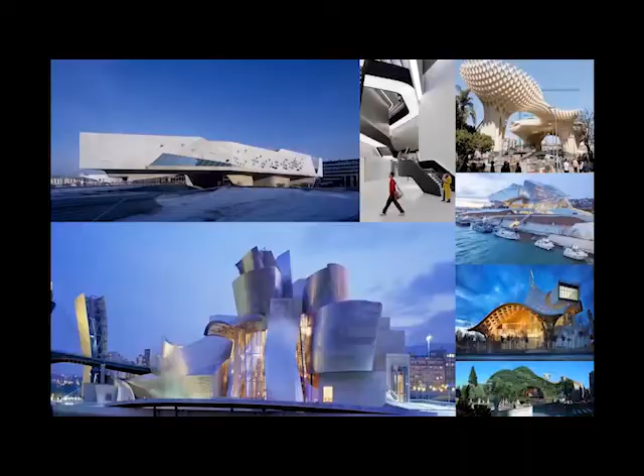I think when we think about this, we are a group of people, and most of the members of Urban Future organization, either within the group itself or people that we collaborate and partner with in terms of engineering and other disciplines, have been working on many different practices, many different constellations, and many of us were participants and active in architectural pieces, in practices that have been quite prominent.

I think what you realized when you worked on these projects was that you were giving up a lot of your energy and your creativity for the greater good of something larger than yourself, in this case another practice. But what we tried to do with Urban Future Organization was say, if this means we are people working together on these projects, maybe we can do this under our own management. And that's kind of what we've done.

So we got together, and our CV is pretty remarkable, because the different members of the organization of UFO have such a broad experience from practice, from research, and from academia.

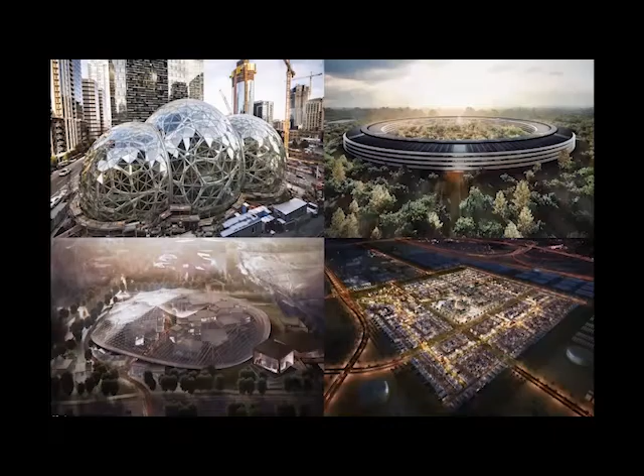I think when it comes down to it, what we try to do as a practice is maybe to challenge some of the conventional wisdoms that we all know so intimately well. And maybe in a changing environment, in a changing world, we have to think about this in a different way.

So today, maybe we have to look at resources, material, planning. Is permanence good? Is it something bad? Do we want to make things return to nature? Do we want to find cheaper, easier ways to construct buildings? Do we want to question traditional materials? Do we want to think about how we live together in different ways? These type of questions influence the way that we practice, the way we teach, and the way we research within Urban Future Organization.

And here, pardon me, this is an illustration. I'm not sure the credit has fallen off the image here, but it's basically a student project. What it illustrates is this idea that we got from the type of partners that we have.

So we work a lot with a practice, as some of you might know, called Arup, Ove Arup in London. We work with other practices like AKT, Buro Happold, and so on, renowned structural engineers, and in a way they have an attitude towards technology which is that everything is possible. Just maybe not everything makes sense, but everything is possible to do.

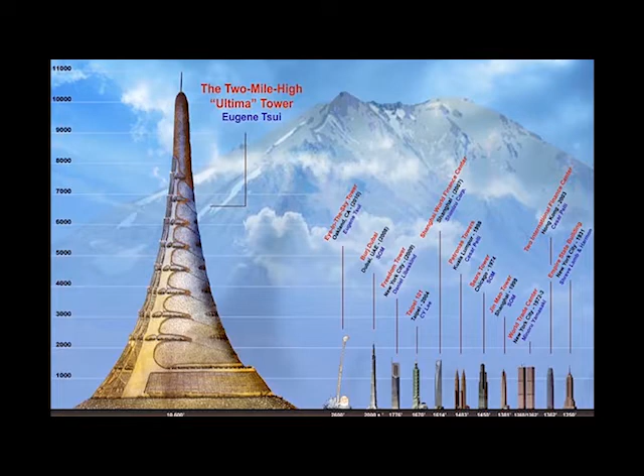So this idea of technology is coupled with this need that we believe in. I think some people are still wondering what this has to do directly with architecture. But for us, we are trying to look for other models where we question the way we do construction, the way we use materials and resources, so we can create an architecture that gives back more to the environment than what it costs.

And this is one of the founding principles that we try to apply in the way we think about our projects. We test this in academia, we develop it in research, and then we try to implement some of these ideas in practice.

And thirdly, we have this idea, and I think we're all aware of this, that architects don't necessarily build buildings ourselves, but we represent buildings, and we produce instructions for other people to carry out our will. And if we only know so much about technology and how we build, maybe that's going to limit what we represent and what we learn how to draw. But it's also the other way around. So this relationship between representation and what we build is quite important.

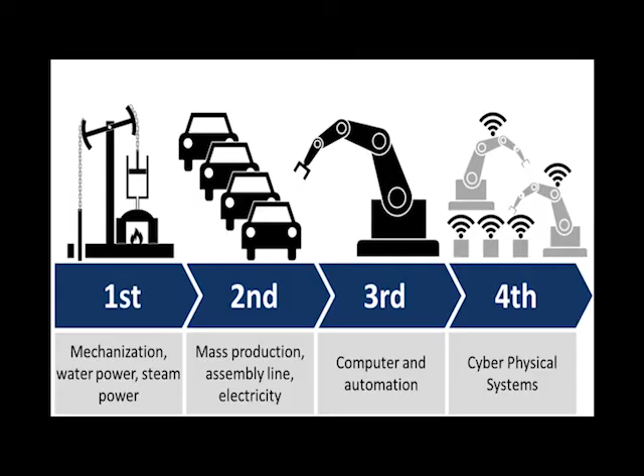So basically, this is about the second, third, and the fourth industrial revolution, and then this idea that architects, we are primarily working on representation, but it's very important to push the border of representation and the way how we construct things.

To go back to, in a way, where I started, this is the idea of trying to work productively or predictively. So it's really an idea of not trying to just reject whatever happens right now, but to try to find models or parts of models that allow us to look at things in a way that makes the existing models, to a certain degree, obsolete.

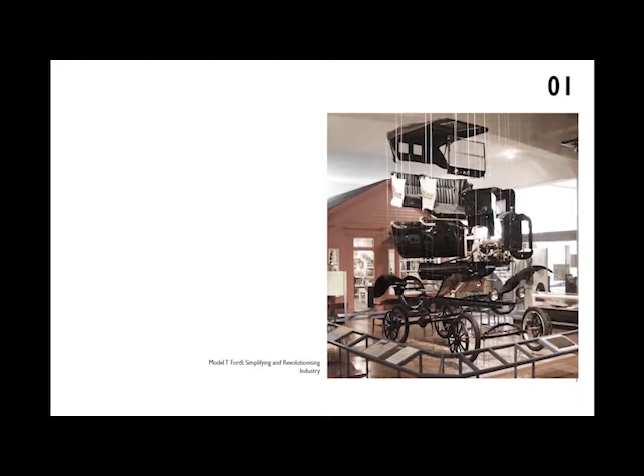So I think what we're trying to do is look for models that let us question that: how can we reduce the number of layers we have? How can we use materials differently to simplify the way we build, or find another way of reducing the complexity of construction we find?

The fact that we are at peak oil, we all know. We think this environmental predicament we face is also an opportunity to rethink the way we do things, putting our empathy, our ingenuity, and technology at the center of our survival.

This is something Rifkin talks about in the Third Industrial Revolution, and I think it's quite central—that there are things we can do to make things better.

But ultimately, I think the real problem we have in the world is how we're going to feed everyone, how we're going to feed our new population. So we have to think about how to contain farm sprawl—the fact that we're turning the world into agriculture—and find other models for how we use land.

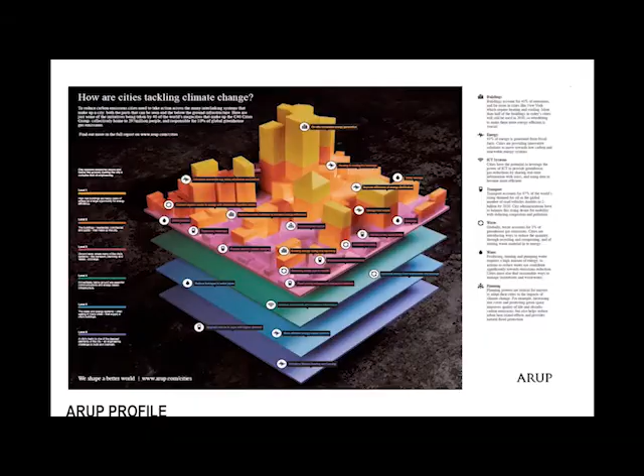So that's really what we're trying to push. This is an idea of what we try to represent in architecture. If we try as students or architects or practitioners or researchers, if we can push ourselves not to be limited to the way we represent things, we can actually work with ideas in a different way.

This is a very simple thing, an exercise we got from my first year tutor in architecture, who claimed that if you can draw a stone, you can draw anything. So you don't limit yourself to the things you can represent in the beginning. It's important both in academia and in practice to evolve the way we represent geometry, form, and buildings, in order not to be limited to the modes of representation.

Today you can talk about that in relationship to digital tools. Maybe it's not drawings, but modeling. Now we can learn SketchUp or some other program, learn how to extrude lots of geometry together. But there is an equivalent to the digital kind of life drawing, where you can also learn how to model and use your digital tools to represent things that are not immediately simple and graspable.

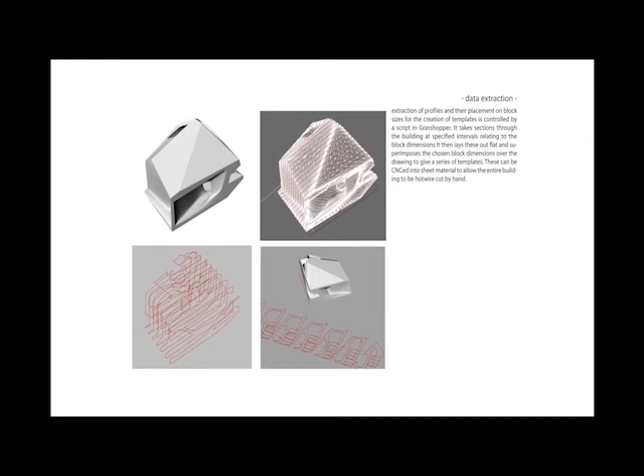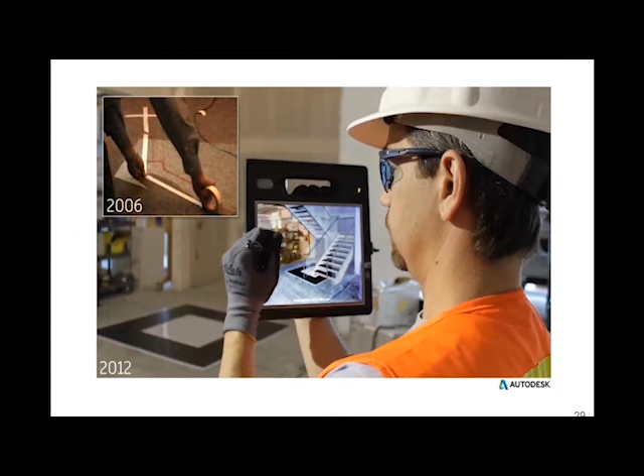So this is something that we try to do. We try to develop the way we can draw and model, so we can be part of affecting everything from an initial design sketch to the way we realize that on site, and how we can use maybe augmented technology to bring this digitally from the digital models into the production of a building, into the actual realization and finished thing.

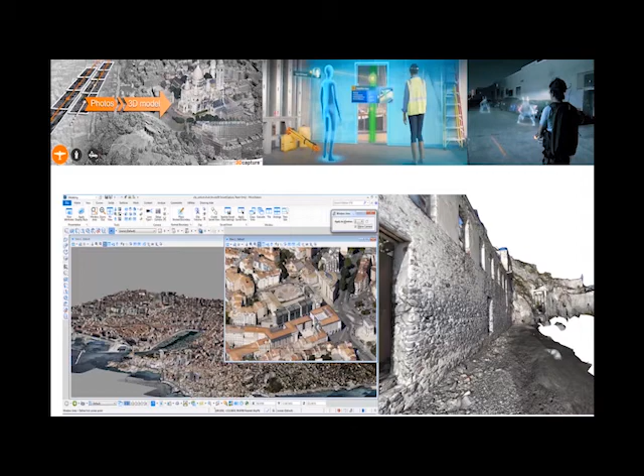In order to do this, we use a range of techniques today. We experiment a lot with 3D scanning. We look at different AR technologies, different ways that we can interact with instructions, so we don't have to do 2D drawings necessarily. We were part of organizing the architecture and geometry conference at Chalmers a couple of years ago, when we were working with this.

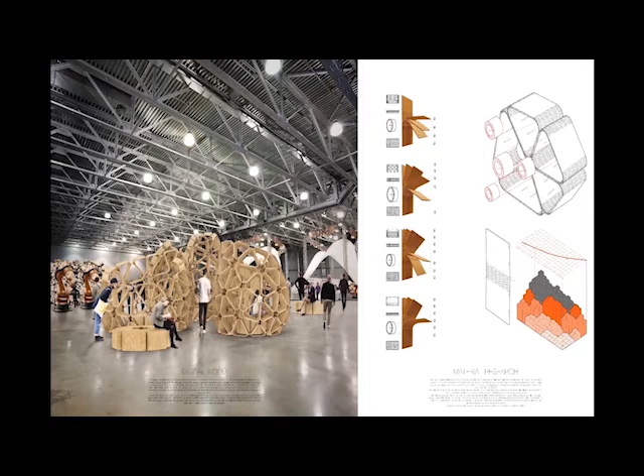Some of these ideas we then try to turn around into student projects in teaching. So some master students of ours developed a pavilion for a very large trade fair in timber construction in Gothenburg, where they got paid to build this prototype using plywood. It's quite simple - they had a producer of plywood and a simple 3-axis milling machine, and we tried to develop a range of different ways to use this.

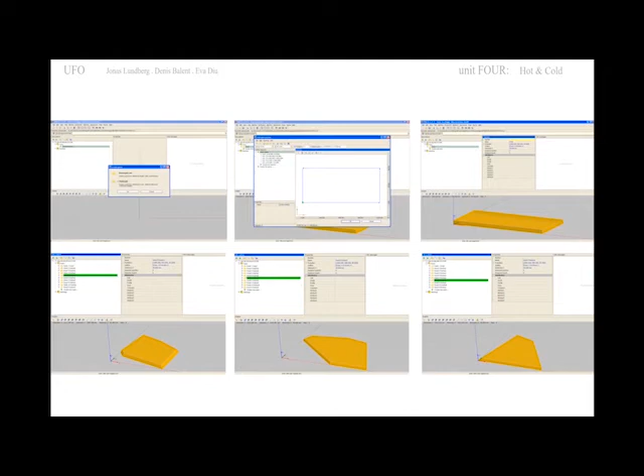The other thing we worked on a lot, which you're going to see in some of our work, is how we work with solid timber construction, solid cross-laminated timber construction, CLT. We worked a lot with the way you actually instruct the machines, so we can go in and work with the code on the machines, so we can produce timber buildings in different ways. Lots of the practice we see here in Sweden is based on CLT construction.

CLT construction to some degree is wasteful, but to some degree we can use material resources that would otherwise go to pellets or pulp or energy, so we can actually produce material from it. Ultimately the idea is that we can customize the parts, and we can replace lots of things that we would otherwise build in concrete with wood.

You're probably aware that there is this big competition going on in the world today about who can build the tallest buildings in timber. You have this pagoda in China, I think it's 1,200 or 1,300 years old, where they could already build 50 meters in timber back then. And today, lots of tall buildings are being developed using timber.

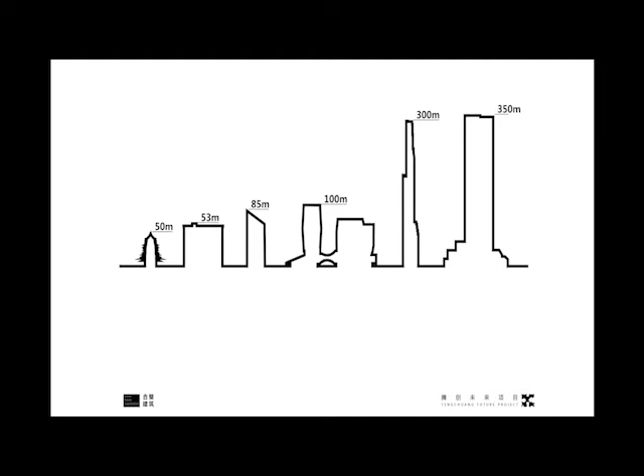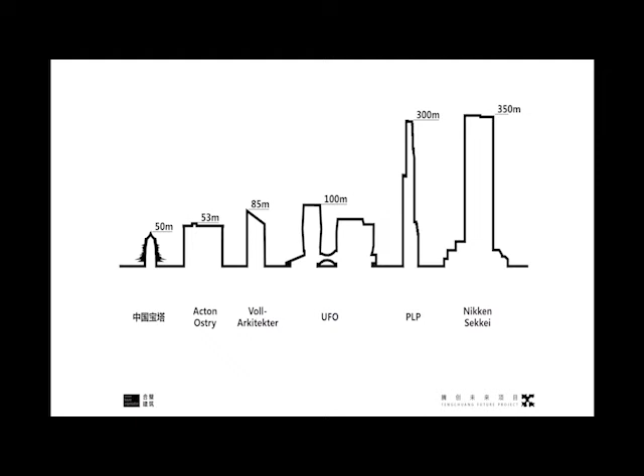And the one to the right, I think it's PLP, maybe 300 meters, and the 350 meter one is a project in Japan. In the middle, you can see what we're doing. We're only doing 100 meters, but we are very much working on this idea with PLP and Nikken Sekkei for very tall buildings. And in the middle, we have this project we've done recently in China, trying to push engineered timber to new heights.

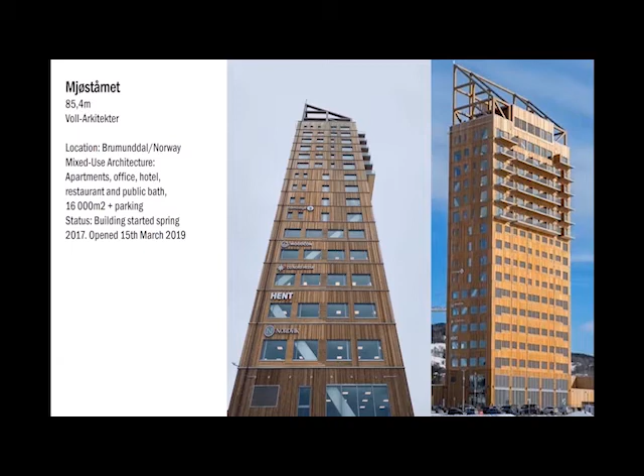And of course, there are many examples of old timber buildings that were quite tall. Today, this building was just finished in Norway. It's 85 meters tall. And of course, here we can replace a lot of cement and concrete with timber as a renewable resource.

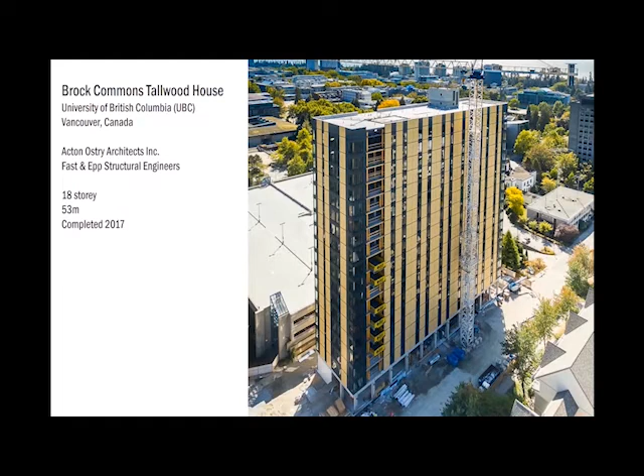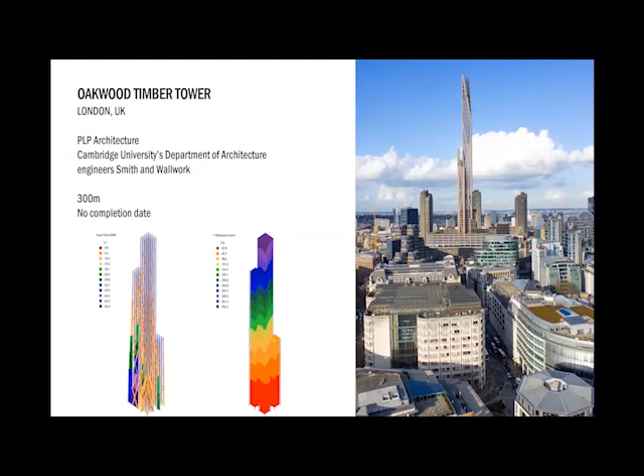And we have a small engineering practice, one of my colleagues runs it, that helps people work with the engineering of timber buildings. And this we do in order to develop the way that we work with this.

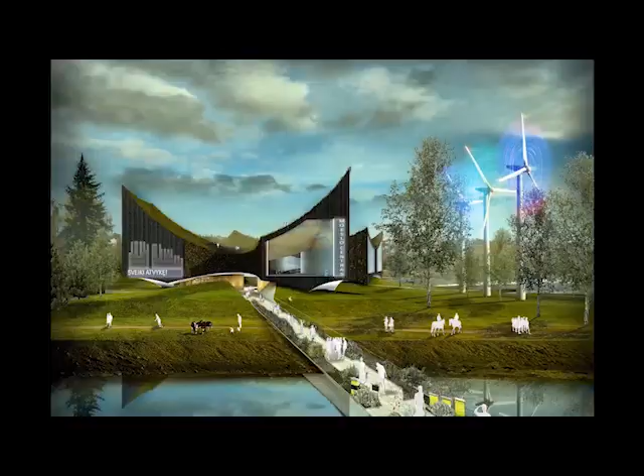So this is an example from another practice, and then I'm going to show you a few things from what we are doing. So this here is a museum, a science museum in Kaunas, in Lithuania. Anyway, this is another example of trying to use engineered timber for a public institution.

In a way, we wanted to relate this to the way we practice. We are trying to work globally, but with this same idea of using resources. So this is a small project we did at the Dongdaemun Plaza in Seoul. In this case, it's not using timber, but biofoam, so we can actually cut this building entirely with a hot wire cutter at full scale.

And then we worked on some very tall buildings. This is a tower we won in Shenzhen Bay, called Cloud Citizen. The idea here is really to make a 470, 570, and 670 meter tower in timber. Actually, here it's more of a hybrid—we have a hybrid deck and concrete cores, but a lot of the rest of the superstructure is designed to be made of engineered timber.

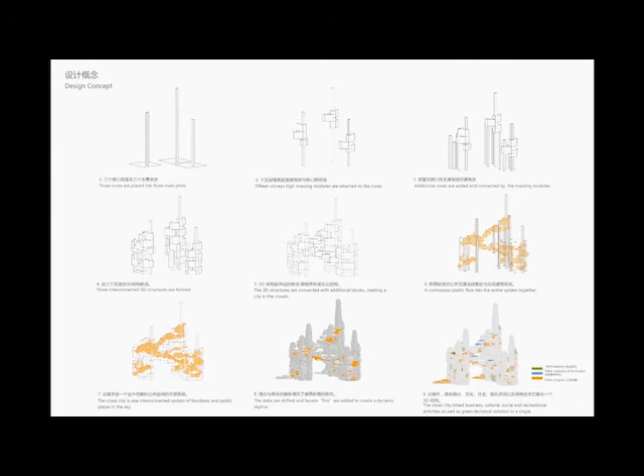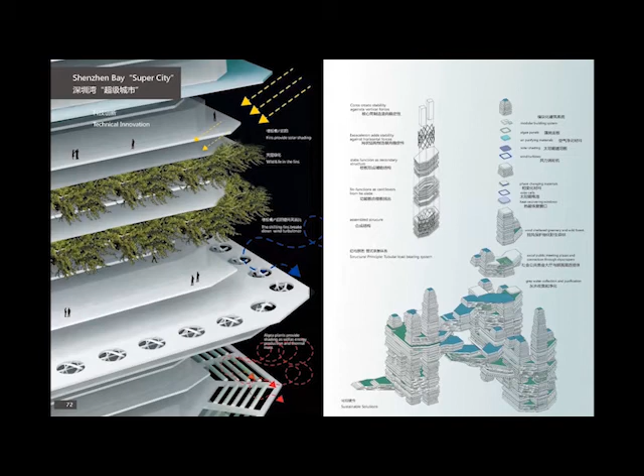So it becomes a really, really vast building, of course made of timber. We were trying to work a lot with how this could generate enough energy to sustain some of the digital infrastructure in the project, and how we can integrate other natural systems that would also allow for natural cooling of these spaces, because you'll have lots of IT infrastructure inside the building.

And then, of course, ideas about what type of place this becomes in Shenzhen, China, where most public spaces have become glass corporate lobbies—we wanted to extend this idea of the landscape into the interior of the project, and then for that to extend out into the landscape.

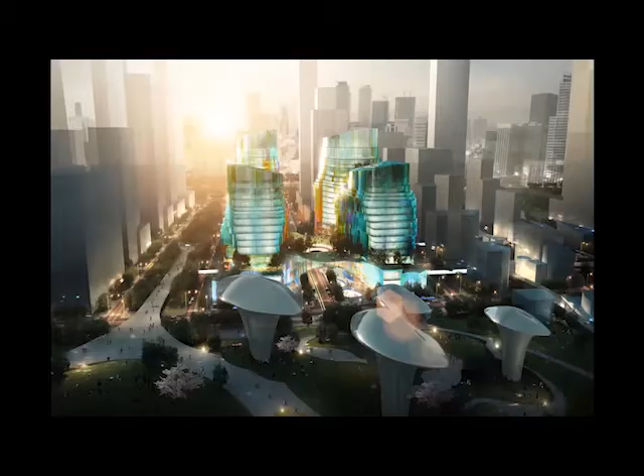So similar idea—this is for another IT cluster, called Tenshuang. It's basically part of Tencent, a big social media company in China, which also tried to create a landscape that continues into the building, to create not just one homogeneous place or space, but a diversity of different scale spaces that you can enter and move into from different directions.

So if you see here in the front of this project, you see these mushroom columns. That's basically a competition for a new museum that was won by MAD. And then our project is right behind that.

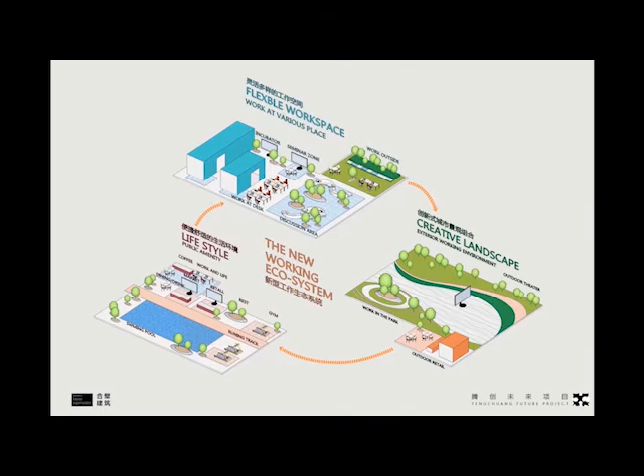We wanted to work out new ways that you can actually work and cooperate. In a way, what they want to do is look for ways that we can work more towards innovation—finding collaborations and other ways of working together that could enhance the opportunities for innovation to take place.

It's an idea of extending the landscape and finding ways of looking at biodiversity inside the building, connecting the building and its systems together. There's a lot of digital infrastructure here, and we're finding ways to cool it—we can use the excess heat from the digital infrastructure for something else, and connect that to the natural systems we're actually growing inside the building.

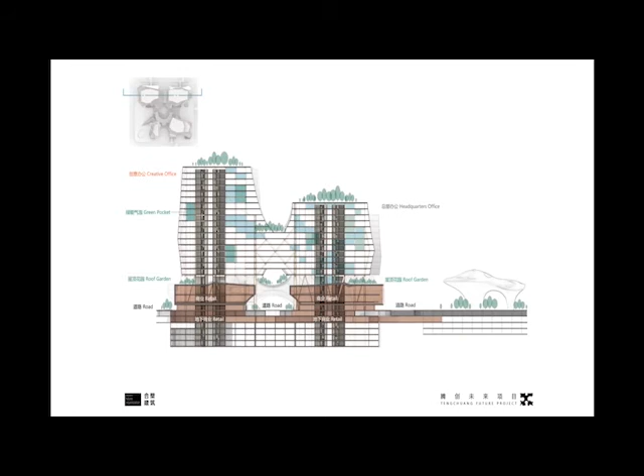So we work on a range of things: photovoltaic glass, rainwater collection, natural ventilation, shading, regenerative lift drives. We're working a lot on different greening processes and the way we can control them.

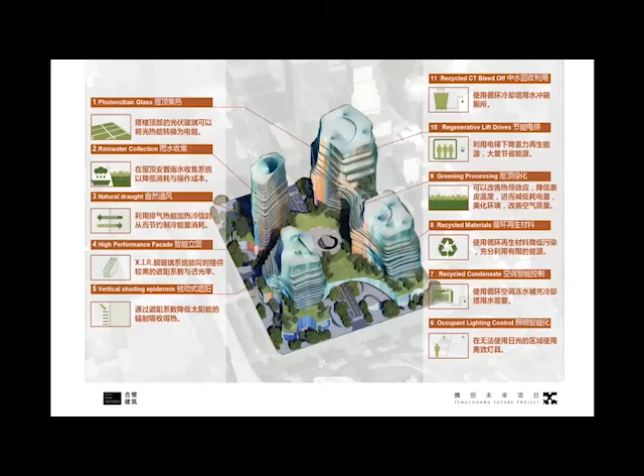We're trying to create this landscape, and also trying to do something different. If you look at all the buildings in the background, you know how a glass city looks from a distance—Shenzhen is mainly steel and glass, some concrete buildings too, but concrete and glass, so the whole skyline becomes entirely gray. Here we try to work with materials in a different way: the structure is made of timber, and we have terracotta vertical louvers in different colors, taken from the Chinese palette—from terracotta itself to different shades of green found in jade—to create a very different appearance in the skyline you find in Shenzhen.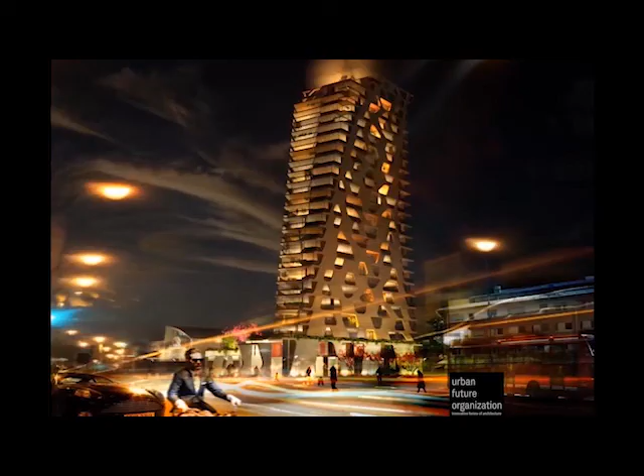Another timber tower, this one in Stockholm, where we try to use the CLT timbers as an external wall as part of the building. So here we have some of the structure externally on the building.

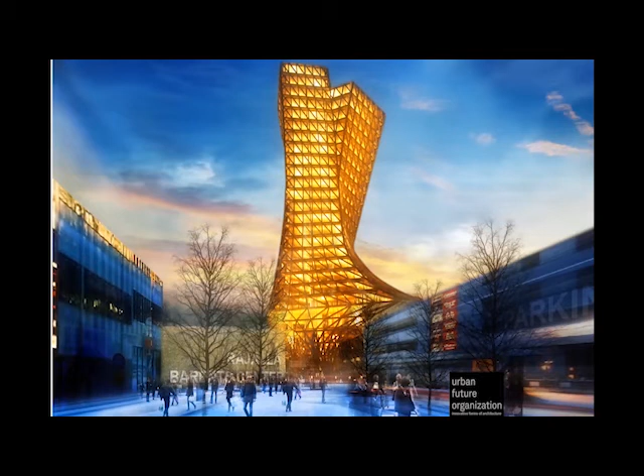And another tower in Haparanda, Sweden, also working with timber. In this case it's not so much CLT, but a glue laminated construction.

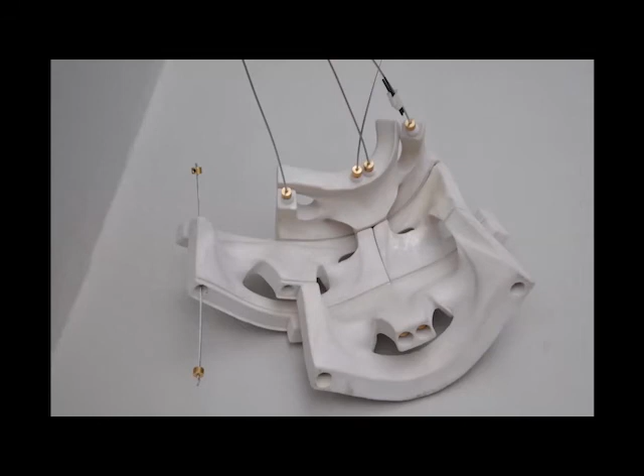In order to test these things, we use lots of prototypes, testing at different scales, of course with 3D printing and so on. We also try to reach out to other people—this is from Monolite D-Shape in Pisa, where they try to print large in stone. We're also trying to use some of those things.

Some of those opportunities led to a student project that we then tried to bring back into the research—some of you might have seen this. This is a student of ours at the Architectural Association in London, named Magnus Larsson. He was trying to make a project called the African greenbelt, where you insert bacteria into the sand that makes the sand mineralize, or become sandstone, basically.

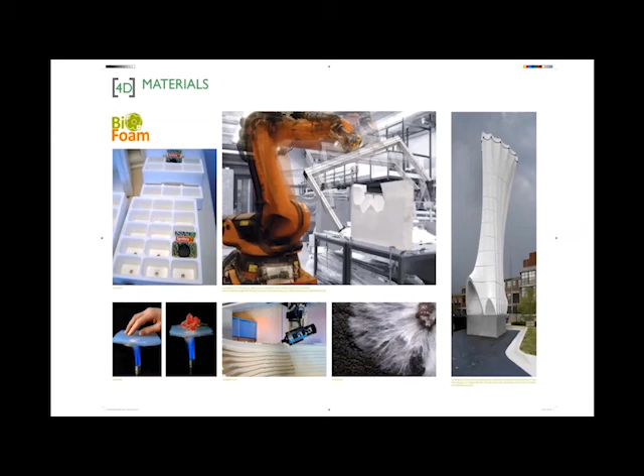In other projects we try to work with foam and different production methods. With students from London Metropolitan University, we did a house for the Solar Decathlon Latin America and Caribbean, where we worked with a mushroom factory to grow mycelium—basically the root strata of mushrooms—into foams of different kinds. So we developed this idea of foam construction into becoming organic, so the buildings are really alive. Some of our students got to present the work at a dragon's den for the construction industry.

The latest thing we're working on right now is trying to 3D print in cellulose. It's not so original—people are already working on that—but Sweden has a very large forestry industry, and cellulose is a waste material, so now we are trying to work on that.

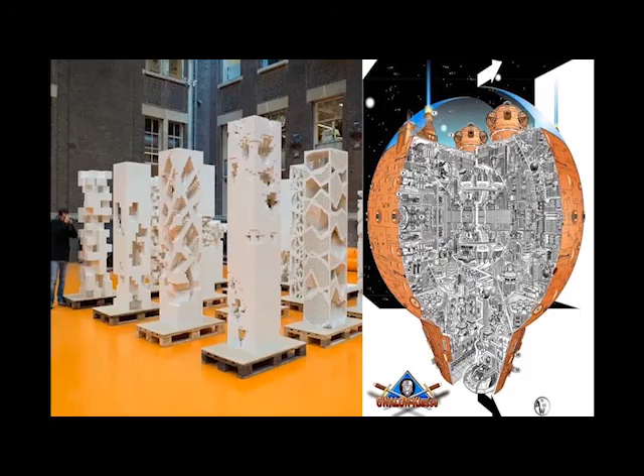So that's the type of material research. And then, of course, this idea of working on models and representing architecture, I think, to push drawings, the way we work with data, with mapping, develop the way we draw, the way we represent things.

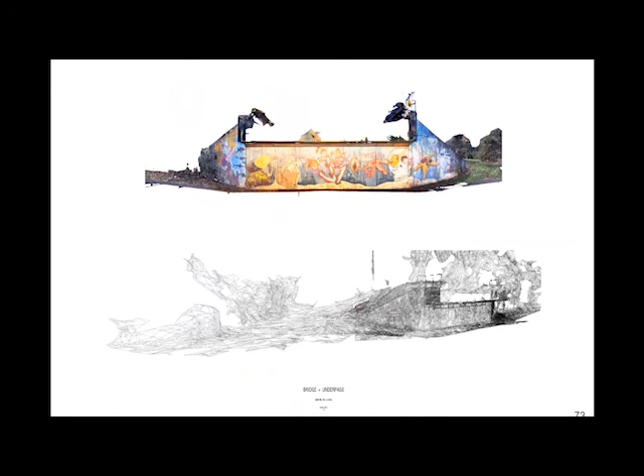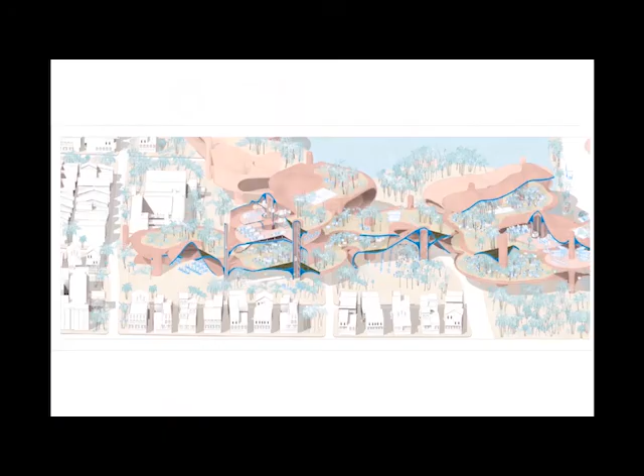And here's some student work from Sangbam at AA, looking at an IT campus. And here we also have some work from the AA, working a lot with representation.

And now we also try to relate this to not just two-dimensional drawings, not just digital design, but what new opportunities does this allow so that we can interact with information in a different way. We don't have to go through a digital model or a two-dimensional drawing representation to a building, but can find other ways of actually interacting with our space and the way we produce things, and the way we actualize and look at things on site differently.

So at the moment, we experimented at AA with some students actually working and designing using tilt brush, which you might be familiar with. It's been around for a couple of years, but not many people have used it in an intelligent way.

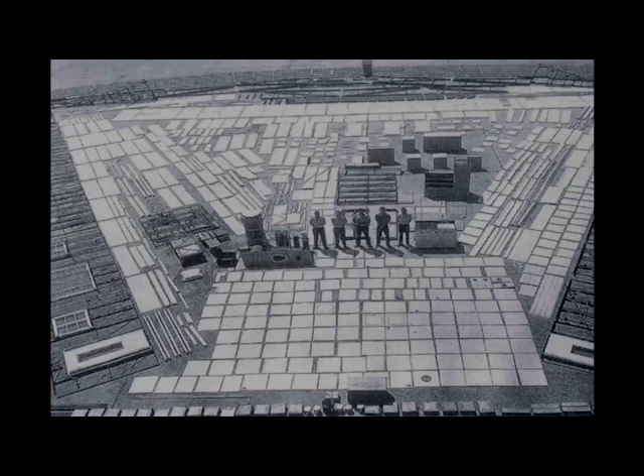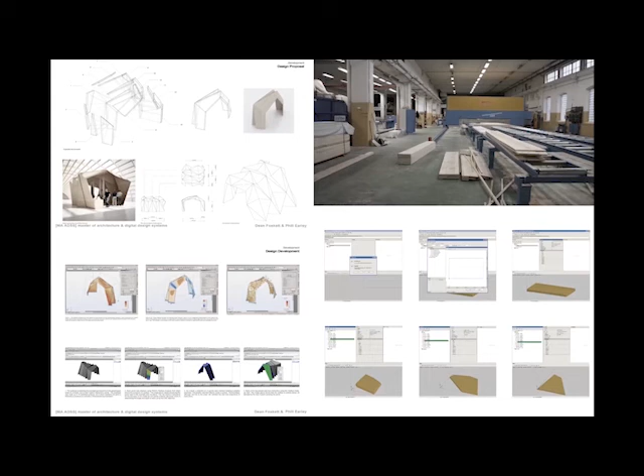And then we try to find ways that we can use these tools to make sense of this crazily complex building process, managing all of these different parts and things, and finding ways that we can go from simple design ideas to testing, understanding the geometry, to actual instructions for the machines.

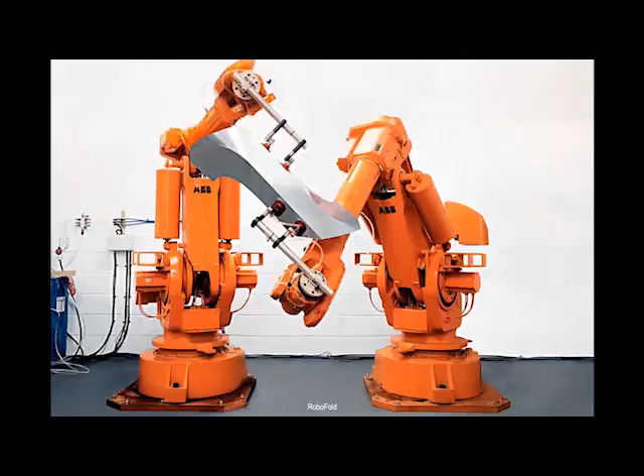This is not from ours—I apologize that the credits have fallen off the images, I'm not sure if it's cropping my slides somehow. But this is Gramazio Kohler from ETH, who's been doing a lot of this, and this is from RoboFold in London, working with different robots in tandem, folding metal or steel together.

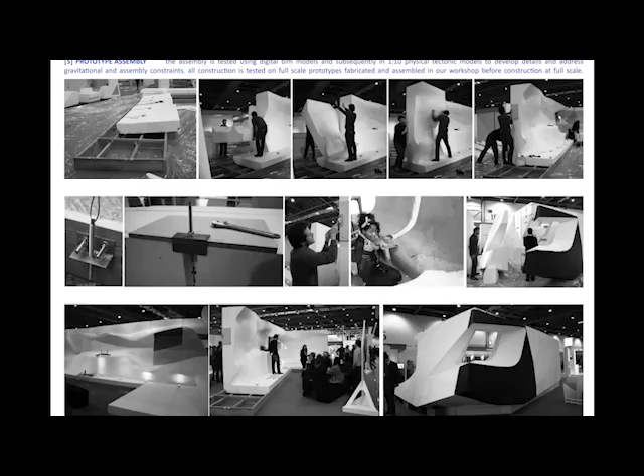And here are some examples from a project we were doing in foam. It's basically a house all made by biofoam.

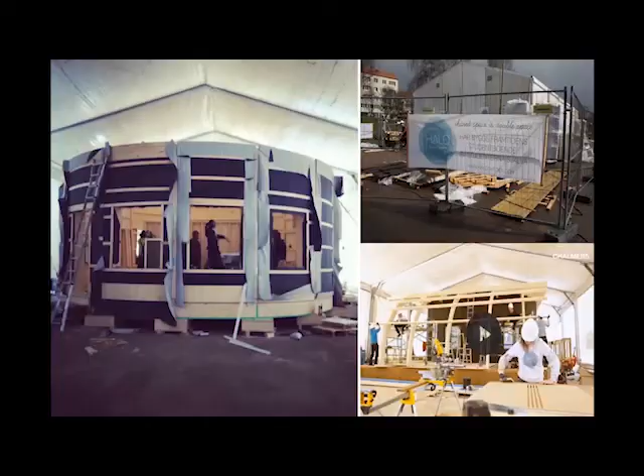Yes, so it's basically a test of a building process in full scale together with students, when we actually get to test the performance. The equipment you see inside is monitoring the actual building. This is the school where I am right now; the previous one was at London Met when we did it in foam.

This is our school at Chalmers in Sweden, where we work on multidisciplinary full-scale realized projects. This project was part of the Solar Decathlon in China in 2018, quite a few years ago now. But we're working on a new one for the Solar Decathlon Europe in 2021, using 3D printed cellulose that we're going to build in full scale with students.

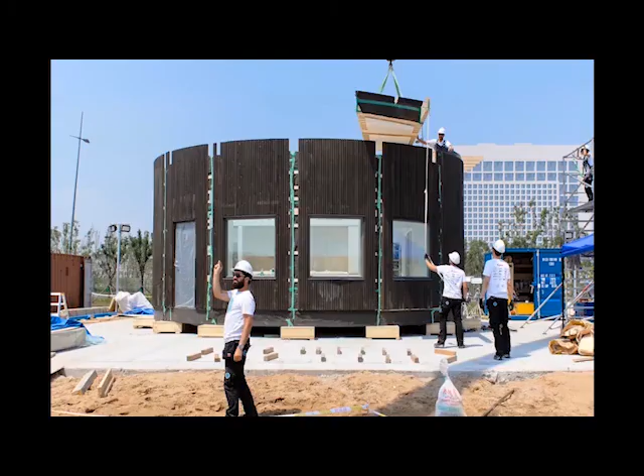So we very much try to work on both the way that you represent and the way that you think about how you build something. This is both an invaluable learning experience for the students, but also something that we learn immensely from as practitioners.

Another thing we do is a project from the AA where we've been working on the relationship between natural material and the very high tolerances you get from CNC, for instance. The guys at Hooke Park have developed a way of scanning the logs, so you can register them and work with joints on the CNC to a high precision—you might have seen this, the Wood Chip Barn.

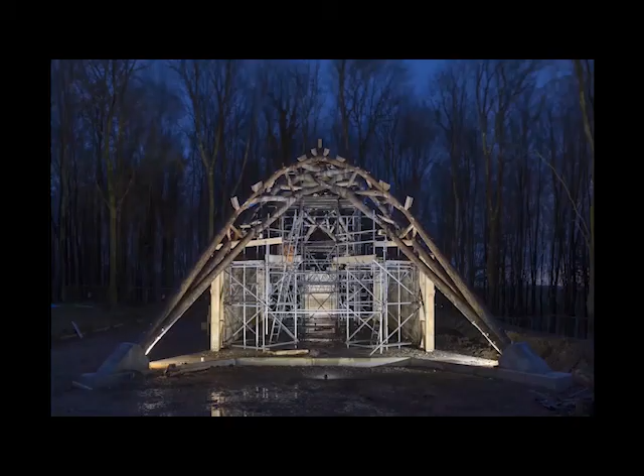So it's all this idea that you take wet timber, or naturally grown timber, scan and register them, and then work on very high precision detailing on these elements.

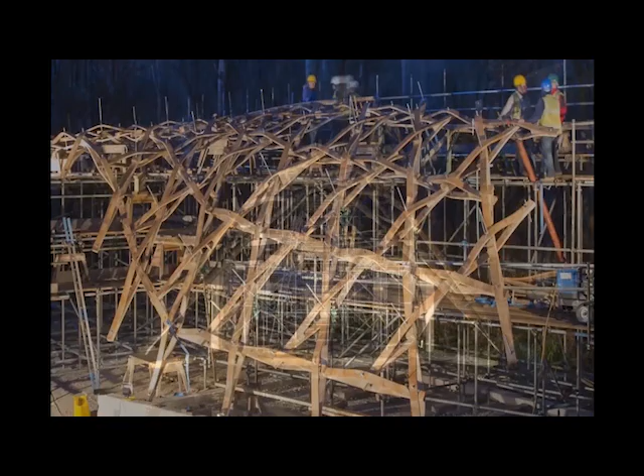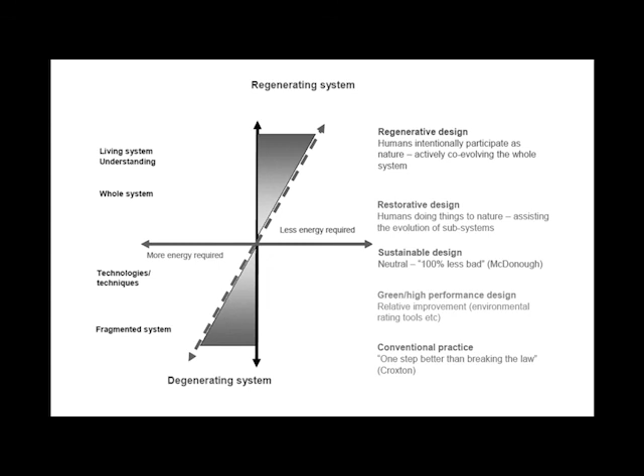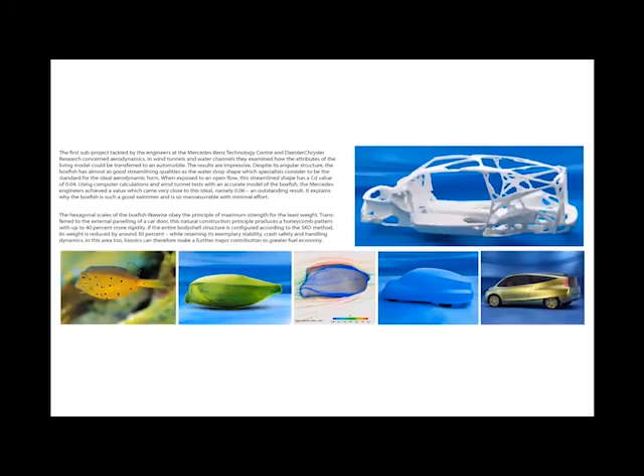So I find this research to be quite interesting. In a way, what we are aiming for is this idea that design has to be regenerative. It's not okay to just let it be sustainable, to let it be what it is, but we have to find other ways of allowing our built environment to give back more to the natural environment than it costs. In order to do this, we have to either learn from nature or use technology proactively to think about this in a different way, and maybe in some cases think outside the box. We can think about this in different ways.

We can stop eating beef, or we can find a way of making something good with methane, for instance. Not to say this will resolve all problems, but I think this is how we see these opportunities. This isn't a picture from us, but at Chalmers, in our media lab, we now have these backpacks, so we can go around and actually experience the digital over the real world. We're experimenting with what we can use this for when it comes to representation and the design of buildings. This is something we're starting up right now in a project called the Digital Twin Cities.

Okay, so why do we do all of those things? Well, I'm going to talk a little bit about why I found these things interesting. This is just before we end. I'm very inspired by this American, or Italian-American, architect. His name is Paolo Soleri. You might have heard about his arcologies, or maybe some of you have been to Arcosanti or Cosanti in Arizona.

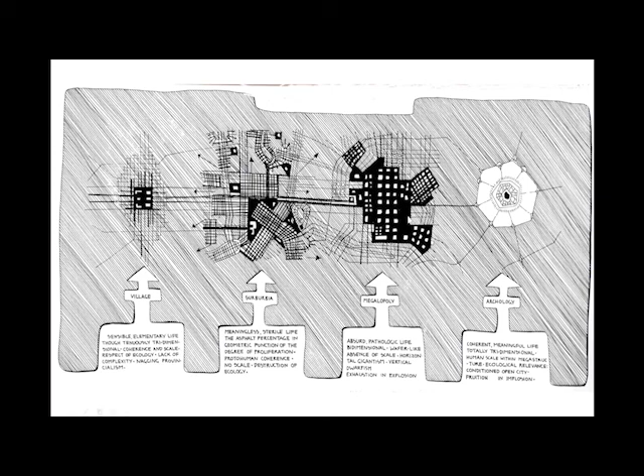So this is something we try to drive with our projects. And lastly, I want to stop with this: for most of you guys, you're going to be maybe at the pinnacle of your careers around 2050. That sounds very far in the future. But here in Gothenburg, the urban plan we're working on currently goes up to 2080, so that's actually 60 years in the future. And 2050, the projects planned for then are actually very real—they already know which areas, what they're going to build in 2050.

But the point is, I think what we need to do with our education, what we take with us from it, is learn to think projectively about what practice and architecture will be like 20, 30 years from now, when I'm maybe at the pinnacle of my power in practice, research, or teaching, wherever you will be. I think it's important that the knowledge we get now is still current even then, so that the things you discuss can actually be relevant.